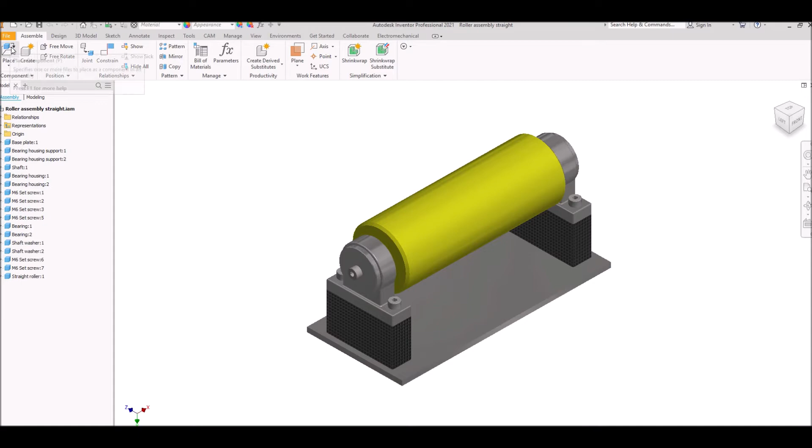So we're going to go up to File here, and we'll go to New. And as always, we're looking for a metric file, then we're going to look for Standard.iam, as you can see there. So we're going to select Create.

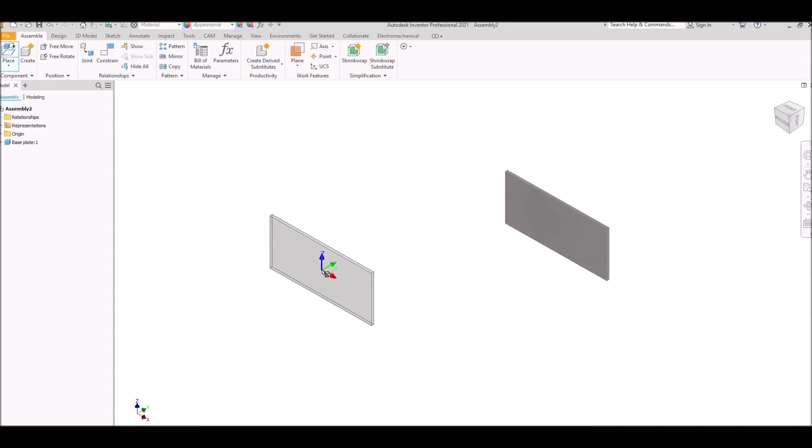Now, like when we're using any of the assembly features, we need to put some components in there. So to put that in, we'll come up to Place. We're going to go down, we'll go to base plate, open that up, and then press left click onto the screen. If we drag away, you can see we can actually put more of these in if we want, but in this case we only want one. So we're going to right click and do OK.

Before we go any further, we're going to swing this around and reset this view as our home view. So we'll go set current view as home, then do fit to view. We'll also reset our front view, so right click, set current view as front, and away we go. So we'll click Home and that's what we'll see.

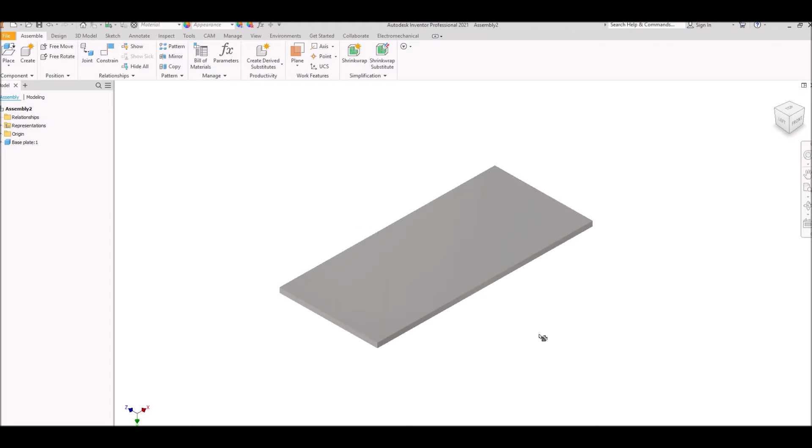Now I'm going to put another couple of components in here, so I'm going to go to Place, and the ones I'm looking for are these housing supports. I'm going to select Open on that, and I'll do 1, 2 of them. I'll right click and do OK.

Now you can see, if we swing this around, there's actually some holes in those components, and we obviously want them facing up so that we can put some fasteners in. I'm going to hit Escape there, and that will close that orbit command.

So what I'm going to do now is constrain these components to this base plate. But before I do that, because at the moment all of this stuff is free to move.

So what I'm going to do, I'm going to right click on that base plate and select the Grounded command, and what that does is it fixes that in place. Now this will save you a bit of heartache later on when you start assembling things. So it's a really important part of creating an assembly to get this big component, which everything else is going to get added onto, grounded.

Next thing we're going to do, I'm going to come up to our Constraint tab, which is up here. You can see there's a range of different commands that we can select here. We are just looking for the basic Mate and Flush command for this job, but obviously if we're looking at other jobs, we'll introduce you to some of these other commands as we work our way through. Now, the solution sort of output in this case, you've only really got two options.

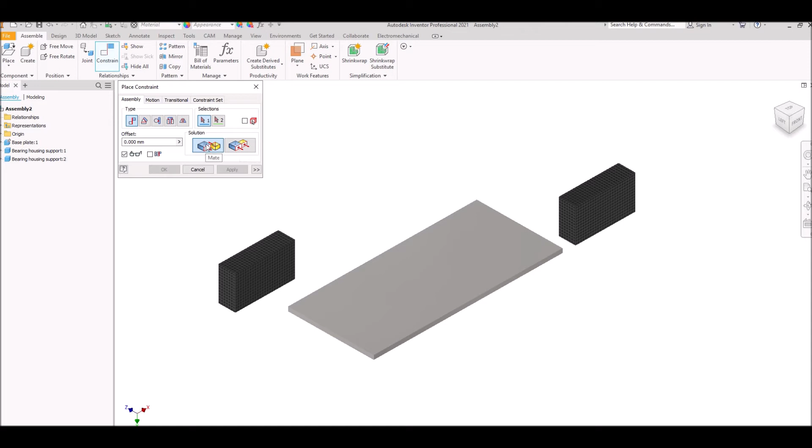So you've got the mate command, and then you've got the flush command. Okay, so the mate command, I'm going to make sure that it's highlighted. I'm going to select the base of this component, the second one I put in. So I'm going to left click on there, and then I'm going to come over and select the top of that face. And you can hear that little noise there. That's telling you that a constraint has been applied. So I'm going to apply that.

Next one, we're going to come along and do the flush command. So we're going to use these different tools for moving this around so that we can find the position that we're looking for. So what I'm going to do now, I'm going to select this front face here, and I'm going to select this face here and apply. Now you'll notice if I rotate my view cube round, that is perfectly in line now.

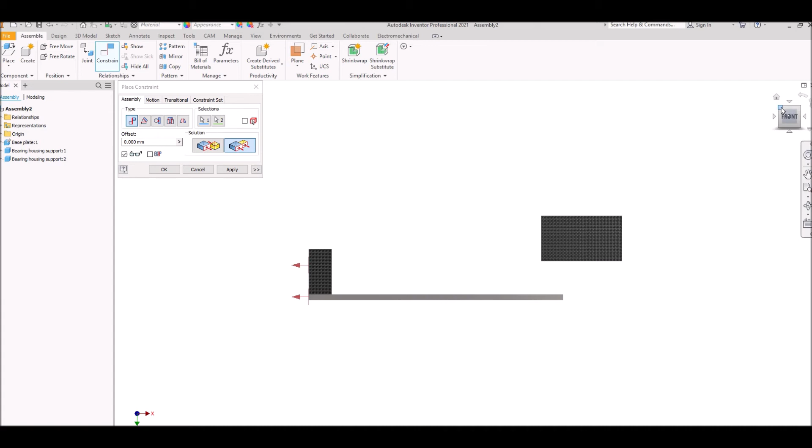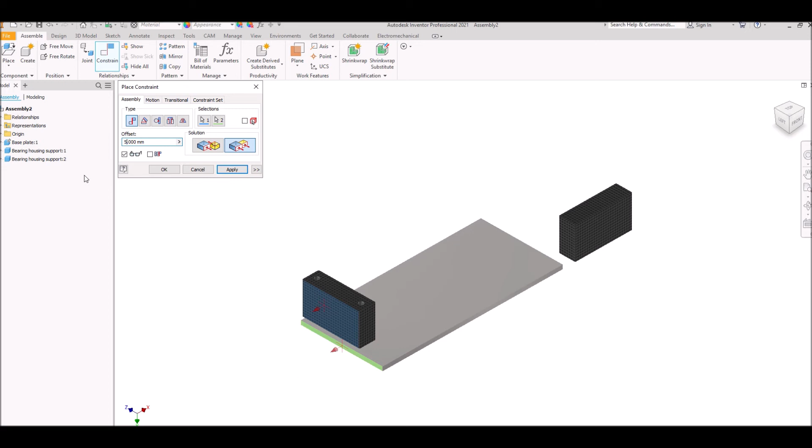But if we think of that little diagram we had at the beginning, I actually want to push that back a little bit, so I've got a little area for possibly putting a weld or something in. So I'm going to put an offset in here, and we're just going to do 5 millimeters. Now, the important thing is that if this doesn't move in the direction that you want it to, then you can pop a minus in front, and it will send it the opposite way. Now I'm going to apply that.

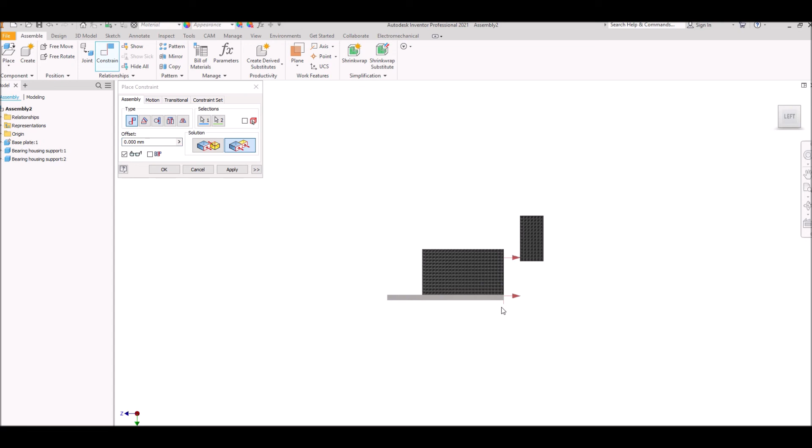Okay. Now I'm going to select the mate and flush command here. So the flush command, I'm going to select that face, and I'm going to select that point, and again, if we swing this around, you'll see that it's in line. But I actually want it to be central.

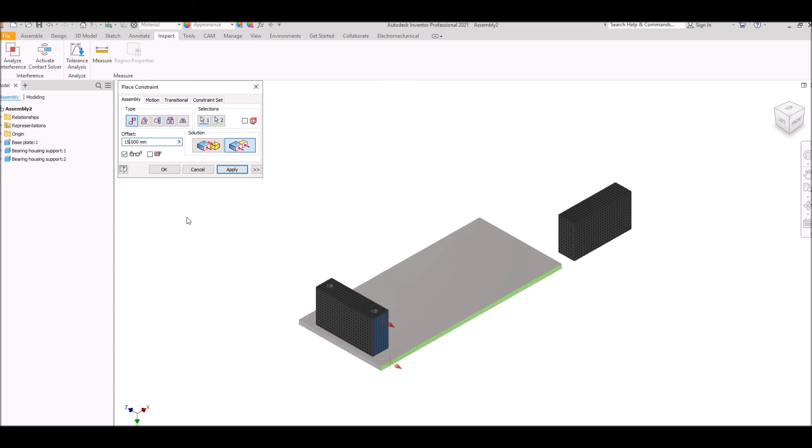Alright, now I've measured these components, and you can measure these using the inspect tab up here. So I know that this base plate is 100 wide, and this support is 70, which gives us a distance of 30. We divide that by 2, and that will make it go central. So I'm going to change that offset to half of 30, which is 15, and apply that. Alright, I'm just going to cancel that, and what that does is it fixes that in place.

Now if I realise at some point in the future this isn't the right size, then I might have to go back and edit some of these commands. And as I say in all my videos, there's various different ways you can assemble things and model things. This is just one technique, and as we work our way through this software, we might use some different techniques and different bits and pieces.

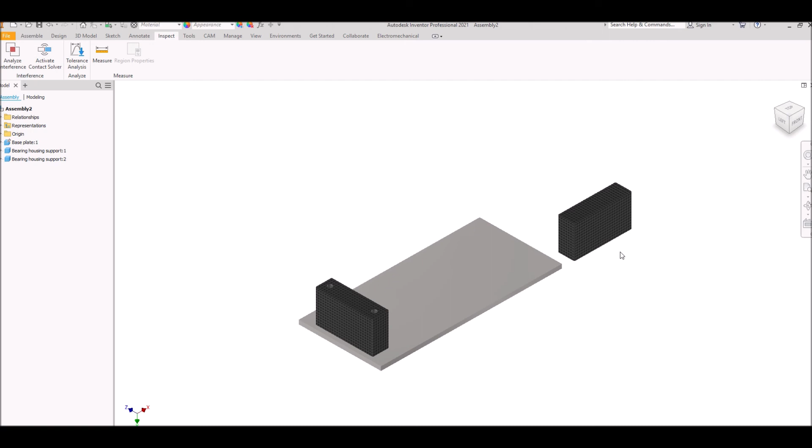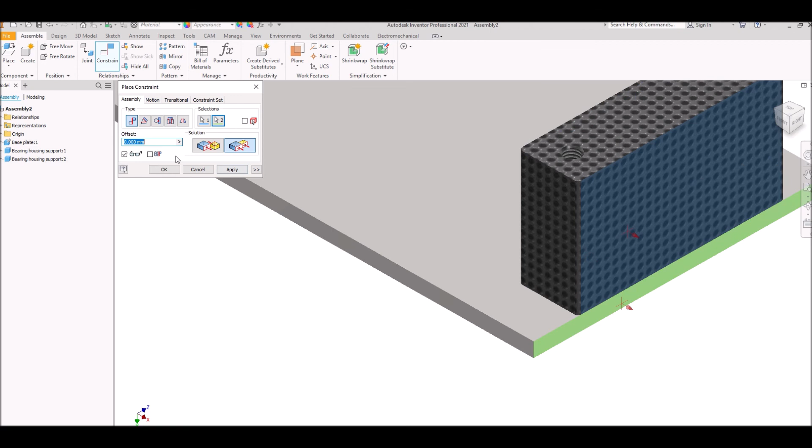Okay, so I'm going to finish this off, and then I'm going to pop that on there just by coming back up. I'm going to do my assemble there, apply, flush, there, and I know that's 15, so I appreciate that I'm doing this a different way than last time. There, and I'll do 5. We'll click OK. So we've got these two components fixed in that position.

Alright, so that's how you assemble components using the mate and flush command in the constraint tab. So hopefully that will be of use to you in future.